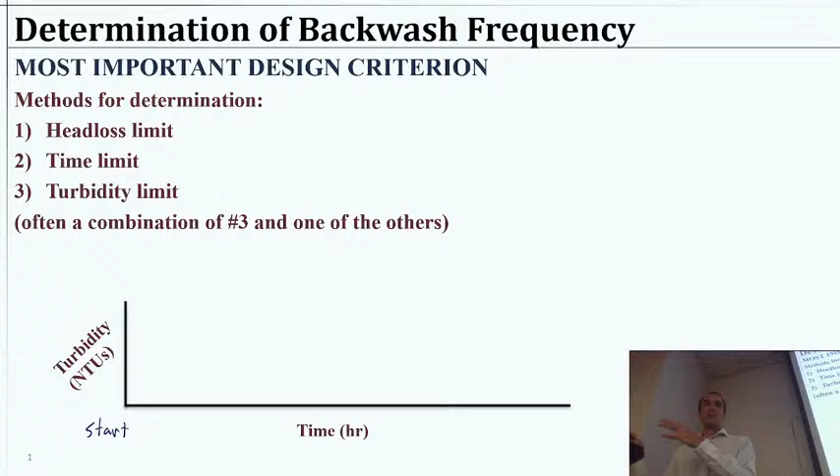Okay, so last time we were talking about granular filtration and the different times where we would stop a cycle. I'm going to repeat this quite a bit, so I apologize if it gets old, but really the most important part of understanding granular filtration is understanding the types of cycles we have to operate on, and therefore how much water we are using or wasting or producing. So if we started a cycle, we do some rinse, and then we operated for some time and we stopped, and then did backwashing and maybe air purging. If that's our typical cycle,

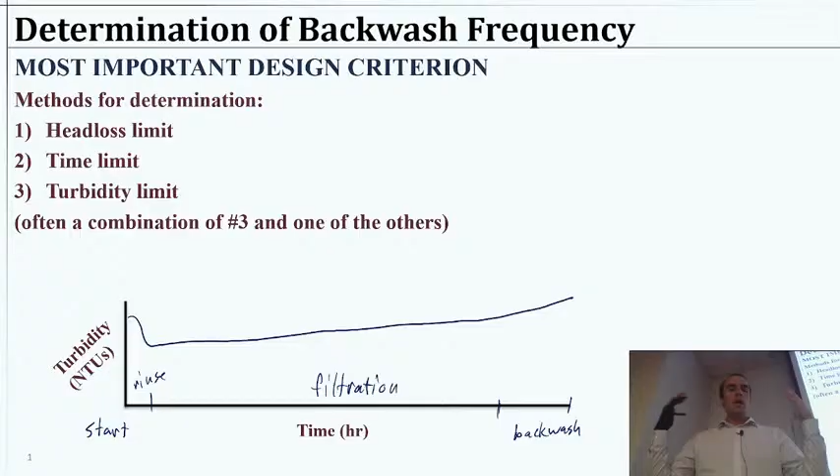we said that the turbidity is one way we could monitor it, how many particles are in there, and it would look something like this, where during rinsing, we have a lot, and then we should have pretty clean water, and eventually it's rising and getting dirty again. So we talked about that last time. Now that we understand how it works, next I want to put some math to it to say, well, how much water did we produce? How can we sketch this up in terms of where's the water going and how much we're producing?

So, of course, in order to design a treatment plant of some kind, even if this is just treating your swimming pool's water with a sand filter, which is probably the most frequent use of these types of filters, your swimming pool or your neighborhood swimming pool, there are probably sand filters doing approximately the same thing. So how do we design it? Well, we need to know how much water we have to produce. Almost all of our water needs are some kind of water demand. If we are providing clean water, we have to provide a certain amount per time because that's how much this community, city, village, whoever it is, needs at any given time.

So we can't say, all right, well, just pause on drinking that water or showering for a few minutes while we take this filter offline. That's a no-go, right? We can't do that. So we have to design on a net water produced per time type of a situation. So how much water can be produced as a net amount, and I say amount, but it's kind of a flow rate, right? We need a certain amount of water per time that must be met.

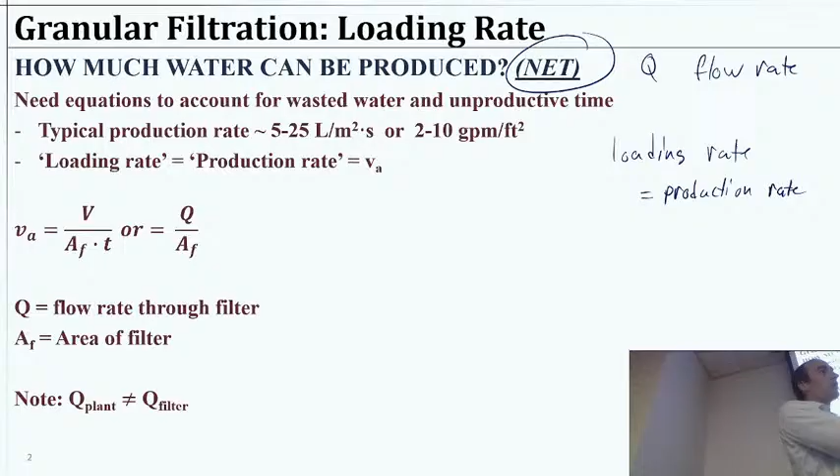Like we talked about last time, as we're piling more water onto the filter, gravity's pushing it faster and faster through to achieve a net loading rate or net production rate that's equal to the rate at which we're adding the water. Okay, so we're loading the water onto the filter. That is during this moment. So that's like the second that it touches the granular membrane to the second that it leaves the granular membrane? This is just during the time that we are producing water.

I don't quite understand your question. We're not looking at any time frame about the water passing through the filter necessarily. We're just talking about during the 24 hours or whatever that we are producing clean water. The rate at which we're doing that is the production rate. Okay? And we're going to distinguish this because we're going to have an effective loading rate that we'll talk about in a few minutes, where we have averaged over the cycle time and accounted for all the water that goes to waste. So one is describing during the filtration itself. That's our loading rate or production rate.

Now we can have an equation for this. We'll say VA, our production rate, is going to be the volume that we're adding per time divided by the area through which it's going. So the filter is going to have some area, and water going through that area per time. So this is not actually a flow rate directly. We do need to find a total flow rate, but we're going to hone in on this loading rate, which looks like a velocity, also known as a flux, because it's an amount of water passing through some area, giving us meters per time, as we'll see in a second.

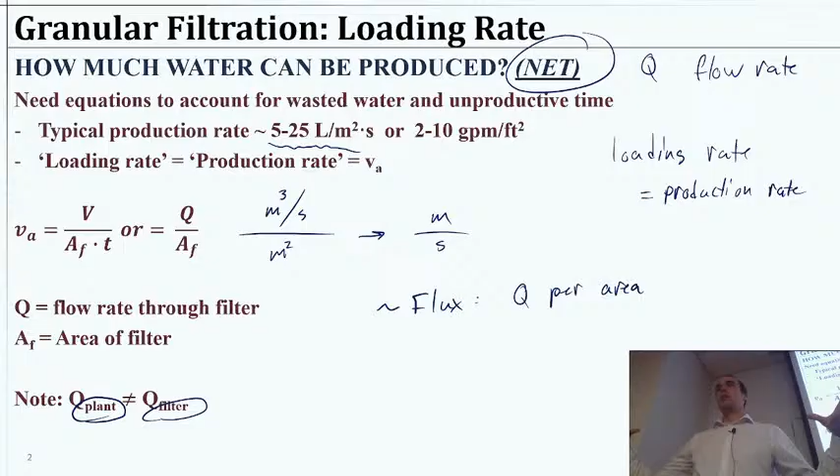The production rate, so these are in terms of like a flow over time per meter squared, but you had derived it as just meter or just length over time. So which unit? So if we take a flow rate, right, so a volume per time, and then send that across some area, your units with a dimension cubed for the volume divided by the area that you're passing it through, which is going to be dimension squared, we'll end up with just the length dimension to the 1 power divided by the time. Okay. Oh, so that's what. So if we take the meters here, we'll end up with meters per second, right?

Right. And so in terms of gallons per minute per feet squared, those gallons and feet squared can't cancel. Right. You'd have to convert how many cubic feet are in 1 gallon. Yeah. So maybe on a homework or something, I might have you do that. On an exam, unless I explicitly give you the gallons and feet conversion, I wouldn't expect you to do that, right? A lot of times I try to just work with metrics, or if I'm not, I've already told you the expectations of what unit conversions I expect you to know.

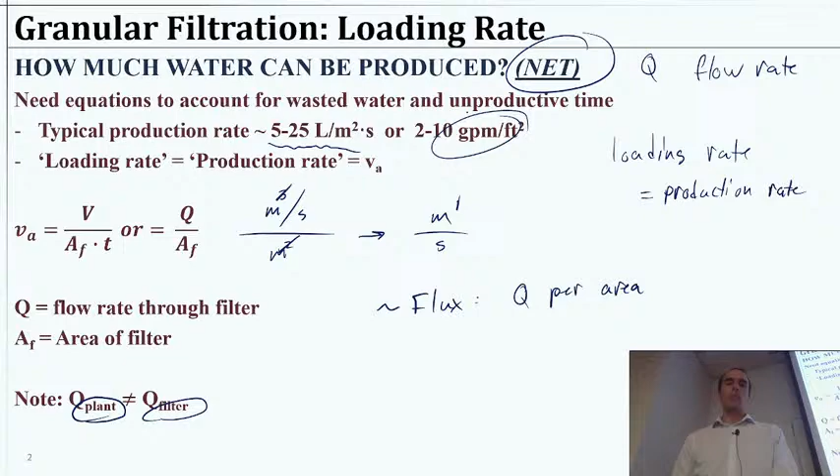I would give you a table or a conversion factor if I wanted you to convert that one. But yeah, it was a good question there. The units are a little funny when we do gallons per minute instead of cubic feet per minute per square foot. All right.

So there's a couple of numbers that we want to know about when it comes to operating these filters. I've already talked about that effective loading rate. Essentially, we want to know how much water we are producing over time on average. I'm actually going to start with a different but somewhat related metric, which would be how efficient the filter is in a given cycle on a water basis. How much water are we actually producing compared to how much we're using to make clean water?

So if we take 100 cubic meters of water, how many of those are we getting out as clean water? So a filter efficiency then will give us that percentage. So if we have a filter efficiency of 95%, then we get 95 cubic meters of water when we wasted 5 cubic meters of water for the backwash and the rinse. So to get there, it's pretty simple. We're going to use this new Greek letter, eta, I guess.

We'll do this on a volume basis. So it'll be the volume filtered minus the volume that we use for backwashing minus the volume we use for the rinsing, divided by the volume filtered. So the volume filtered will be the total water that came in during that filtration, right? So VF, this will be during filtration. If we have some air purge, there's no water happening there. And then backwash would be here. And then rinse will be here.

Okay, so if we just define this in terms of flux, which we will take a look at primarily in the membrane section, we often define flux as Q over A. We could rearrange this and say Q is equal to the flux times the area. The flux is essentially our loading rate.

So if Q is VA times the area, well, if we want to change from Q to volume, we have to multiply it by time, right? As Q is volume per time. So if we continue this here, we would say volume per time equals VA times A. Multiply both sides by the time, and you get our little equations over here.

You'll see that we have some subscripts for each component because during filtration, we have a loading rate. During rinsing, we are using that same loading rate. During the backwash, we are going to use a different loading rate. If you're given no information, you could assume that it's the same, but oftentimes we'll use something a little faster.

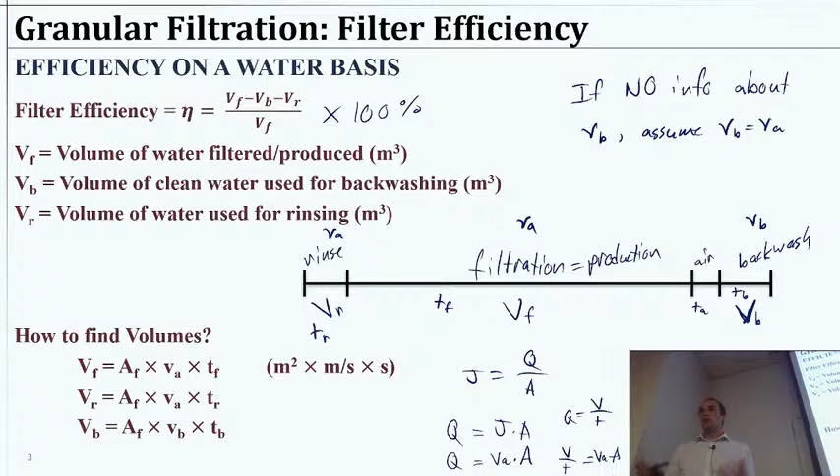Okay. Now we get to the other piece: what is our effective loading rate? This is actually going to be a little different than simply taking that efficiency and multiplying it by our loading rate. You'd think maybe you could do that, but it doesn't account for the differences with the air purge. It also doesn't do a good job accounting for the time that you might be operating on the backwash at a different rate.

So the effective loading rate will be close to that efficiency times the normal loading rate, so you could double check that, but it is a different formula. It does come out to have different numbers. What we can say is, let's take a look at each volume per area. So each amount of water that has passed through for each step, the filtration minus the backwash minus the rinse, divided by the total cycle time.

A simple way to say that would be the volume filtered minus the volume backwashed minus the volume rinsed, and take all of that and divide it by the area of the filter. You see that's in the denominator in each component here, so we just brought that to the bottom. So we'll have the volume filtered minus the volume backwashed minus the volume rinsed divided by the area of the filter times the cycle time.

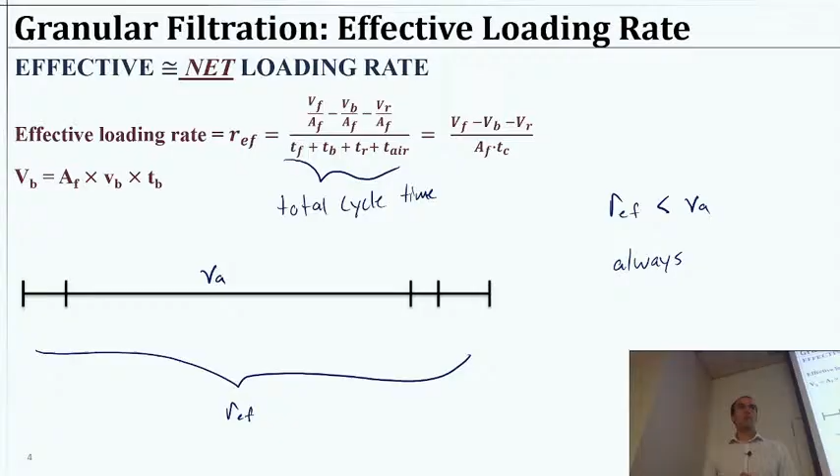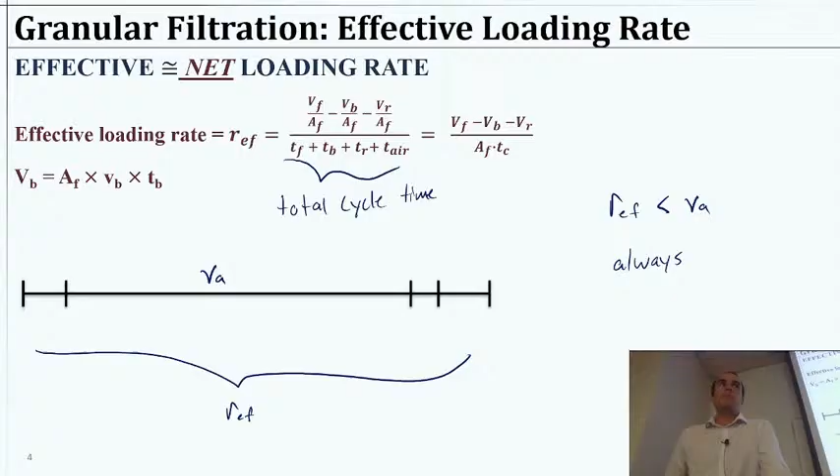Yeah. So essentially, the effective rate considers how VB, the rate of backwash, takes away from the rate of production. Exactly, and where it's doing that is right here. So we take the volume filtered minus the volume used in the backwash, minus the volume rinsed. That has to go to waste, and it accounts for it there. All right, make sense? So let's do a problem then, and we're basically done with granular filtration.

All right, so we have here a conventional water treatment plant that treats 2.4 cubic meters per second of river water. The filters of the plant are 8 by 8 meters surface area, and they operate on the following schedule. The filter is cleaned once in each 24-hour period. The backwash rate is 10 liters per square meter per second, and that's done for a period of 8 minutes.

It takes an additional 8 minutes to drain the filter and break up the media with air injection, and of the total filter cycle time of 24 hours, 15 minutes is used for rinsing of the filter after backwashing. During production, water is applied to the filter at a rate of 5.5 liters per square meter per second. So you can see here a lot of different bits of information with the language that we've been using. Once we get it all in place, we should be able to solve the problem.

So A, what is the filter efficiency? I'll rewrite these equations here for you. And B, what is the minimum number of filters required by the plant? So feel free to work together, feel free to work alone, but work on this, feel free to ask me questions, and see what you think.

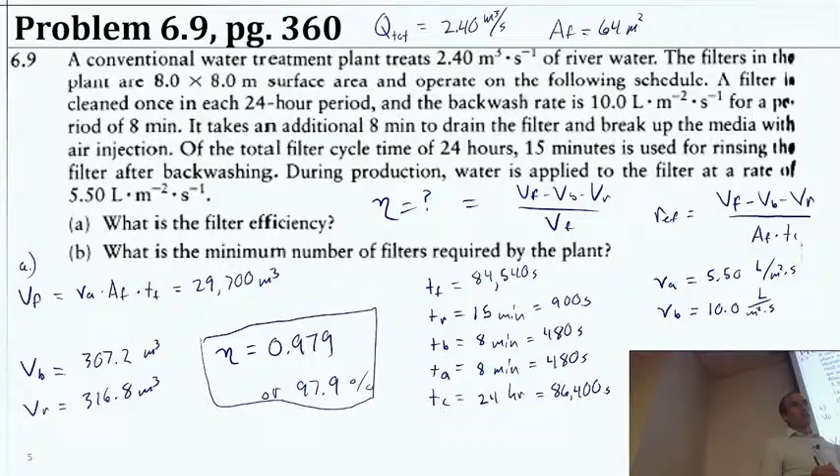And then when we set up each piece here, the volume filtered is going to be essentially that loading rate times the filter area times time for the filtration. Rinsing would be the same setup, it's just smaller time. And then backwashing will be the same setup except using the backwashing time and the backwashing loading rate. So if you do all that, you should get these volumes. If you get these volumes, then you should get this filter efficiency putting it into the numbers, right?

So then we have part B. What is the minimum number of filters required by the plant? So now we're trying to meet that Q total of 2.40 cubic meters per second. Have you guys already attempted this? Let me ask a better question. Would you like a few more minutes to attempt this part now that you got that? Yeah? Okay. So maybe I'll set up just a tiny bit of it, and I'll just go ahead and say, have at it.

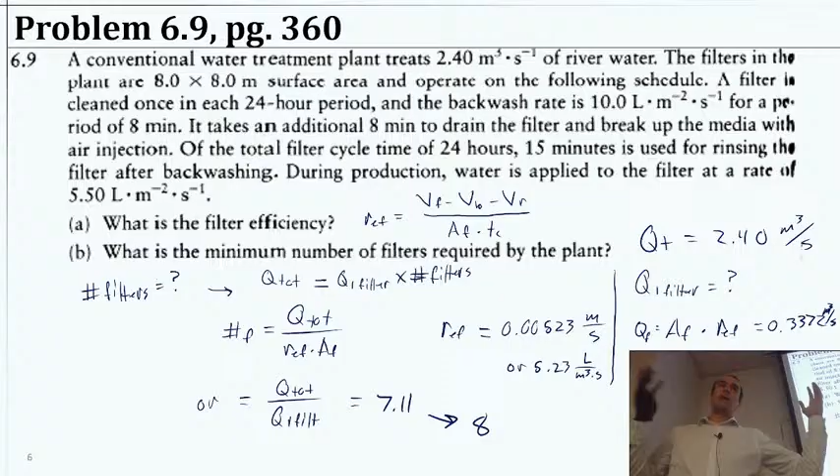Okay, so I think this gives you plenty of appreciation for this flavor of problems. It's not exactly mass balance, but it's still kind of a materials balance sort of a deal. You'll find this and membrane filtration are kind of similar in that manner. We need to know the context. We need to be able to navigate the terminology in order to smartly design some filter for the treatment.

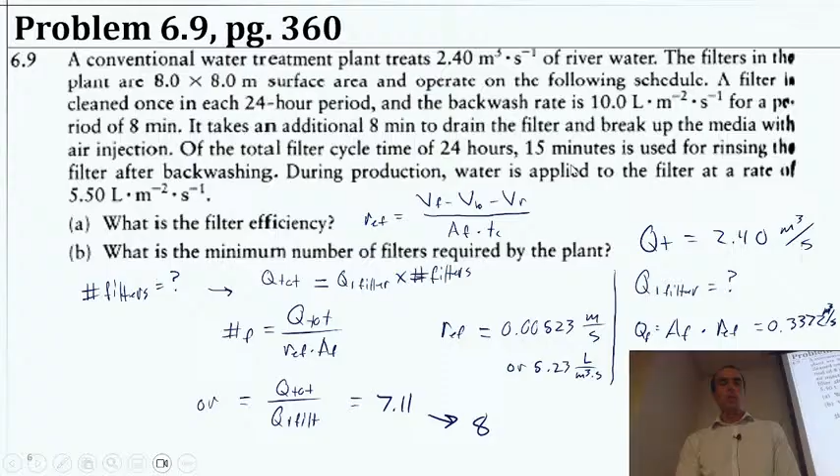Okay, this brings me to your reading assignment. There was a very large outbreak back in, this paper is '94, but I think the outbreak was '93 perhaps. And this was in Milwaukee. There was a very large cryptosporidium outbreak. It did have something to do with the filters. So this entire section 2 of our course, the exam 2, is kind of related to this. So as you go through the next few lectures, this material might be kind of interesting. Or at least you're going to have to take a look at it to try to do well on that

little quiz. But essentially, you'll find out that cryptosporidium is a stomach pathogen. For most people, you'd think of it as hiker's diarrhea. It's something you might contract if you drank water that was not really too safe, or you did a poor job disinfecting it. Some resistant organisms have these cysts. It doesn't take many of them to give you an infection, and then it stays for a long time because it takes a while for your body to get rid of it. So that's sort of the thing.

Now, it's a big problem for people that are immunocompromised. It's very difficult for somebody with a compromised immune system to deal with it. So it actually caused many deaths for that type of situation. So take a look at that. You'll see on our Moodle page, the reading looks like this. It's not super long, but it is kind of a science article, technical article.

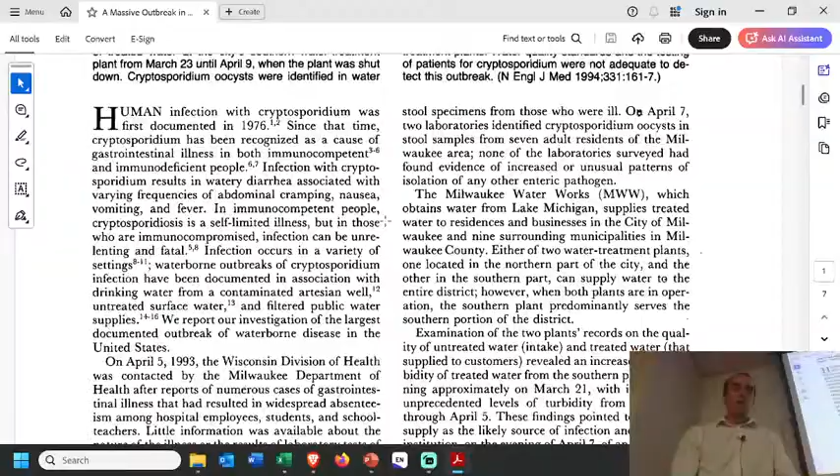So what I do not recommend is you try to read every last word and understand every last word. That's not the way to go, okay? I know that might sound funny. I'm giving you a reading assignment telling you not to read the whole thing. But really, when you want to learn something from a science article like this, a journal article, you probably want to do a couple things. One is read the abstract. Make sense of most of it. Get the picture of what's going on. Then take a look at the introduction. This will give you the context of what's happening.

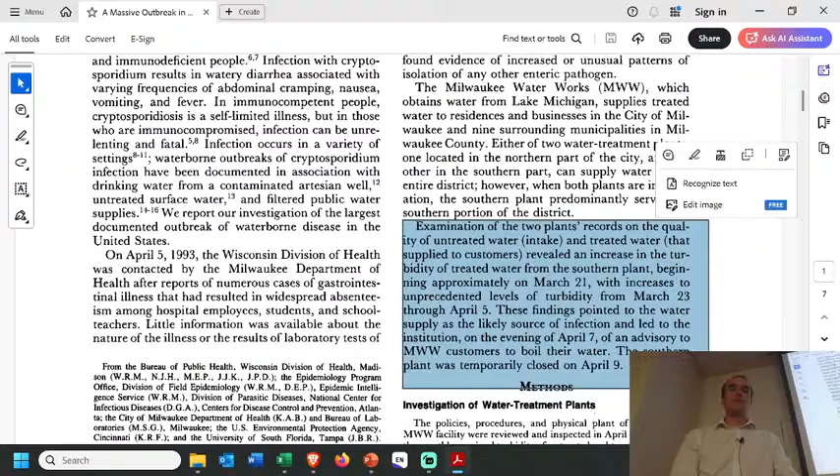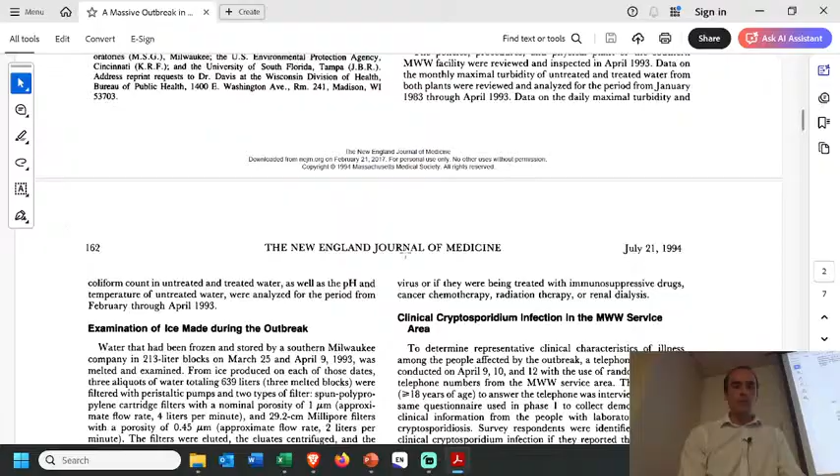The last paragraph in any intro is probably going to tell you exactly what they did to study. So that's a great one to focus in on. The methods are probably going to go over our heads, even mine in some cases. So maybe glance at them and see, oh, okay, they did clinical stuff during the outbreak. I guess they preserved some samples, surveillance stuff, the infections. Okay, skipping along, results. For results, maybe the first thing you ought to do is take a look at the graphs. Try to make sense of some of the graphs. And just save yourself a little time from trying to understand every last word.

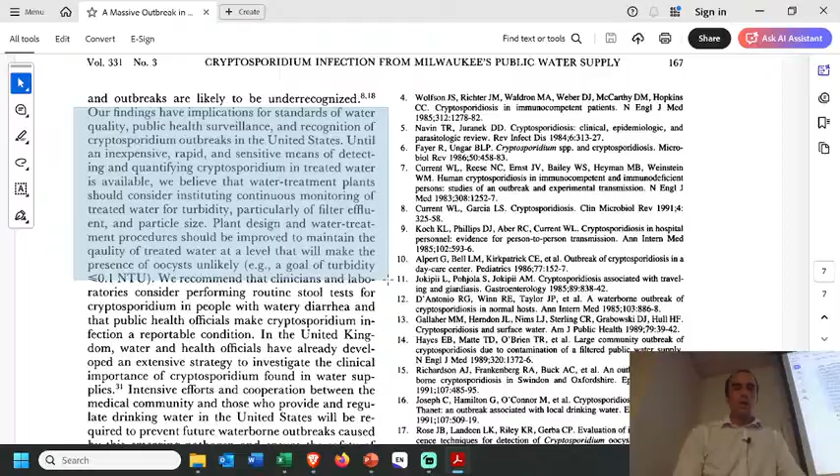Okay? And then, of course, eventually get to the end where they have some conclusions and say, okay, I'm going to pay attention and see what they really say they learned here. I guess they don't really have a direct conclusion, but they're going to conclude in some manner. So take the last real paragraph of the paper and focus some attention there to see what they really care about in this paper. So read as much as you feel like you need to learn something, and excel on that quiz.